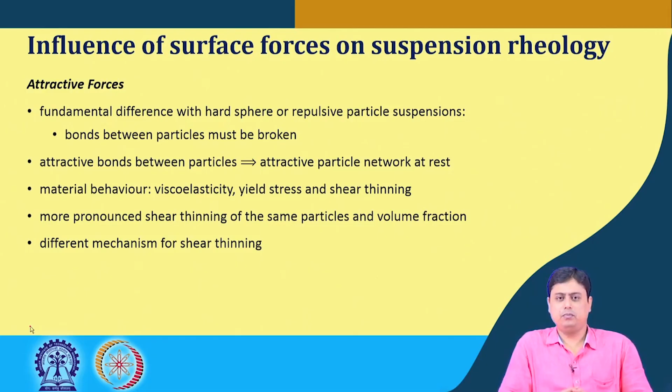So, one thing is clear: the material property will depend on the bond strength. The stronger the bonds, the more extra stress we have to apply in order to alter the viscosity or to make it flow.

Now this network of particles, the bond in between, has to be broken. While at rest, these networks encircle some of the liquid. As this network is squeezed or flattened, or bond breakage happens at high shear rate, more and more liquid will be released from inside that network.

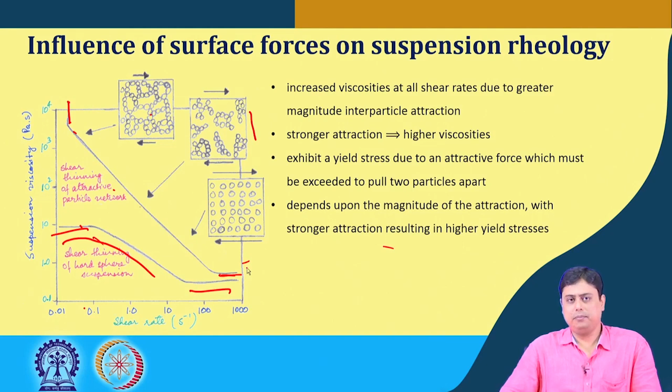Because as we increase the salt concentration away from IEP, the magnitude of the zeta potential decreases, and so does the EDL repulsion. So it becomes more and more attractive in nature. So this attraction increases as we increase the salt content. So once the overall interaction is attractive in nature, then quite naturally we need higher yield stress to initiate the flow.

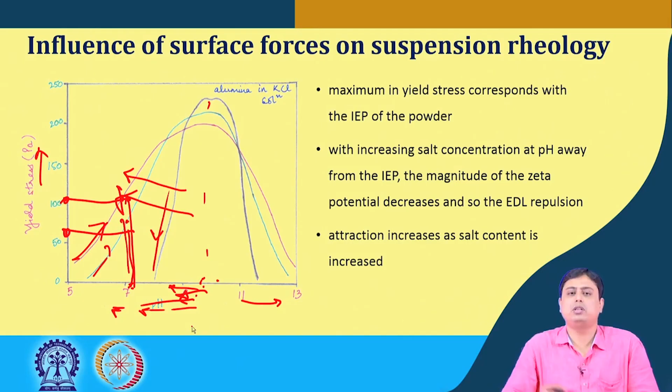This is because the zeta potential decreases and so does the EDL repulsion. So the overall interaction between the particles becomes attractive in nature, and as it becomes attractive, it is difficult to flow; the yield stress increases. But for a given salt concentration, if you go away from IEP by a change in pH, the zeta potential increases, so does the EDL repulsion, and it becomes more free flowing or more dispersive in nature; yield stress decreases.

Now in terms of particle size, how it is influencing the suspension rheology. In the case of the hard sphere approach, there was no influence of particle size on the suspension rheology. So this is another big difference between these two approaches, because here we have seen that the particle size influences the surface forces, and once we take into account the surface force, the particle size will influence the surface force and consequently the suspension rheology.

But in hard sphere there were non-interacting particles, so the size was not of any consideration in that approach. Now here the yield stress, how it would be influenced by the particle size, and similarly such analysis can be done for the other parameters. So yield stress basically is proportional to the number of bonds per unit volume and the strength of the bond, because in suspensions containing attractive particles what matters is the number of bonds we need to break and the bond strength.

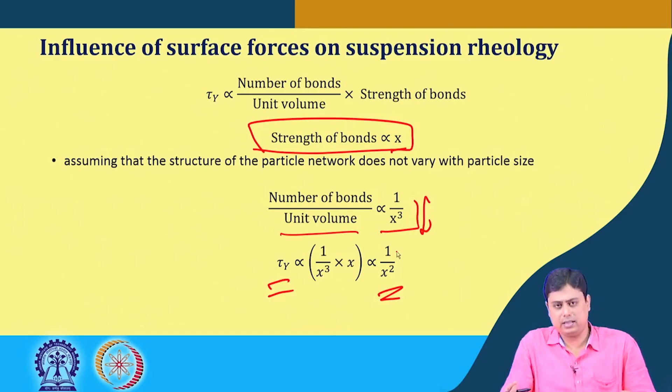So, the overall relation between the yield stress and the particle size in case of attractive particle suspensions is 1 by x square. Which means as the particle size increases, yield stress goes down. The viscosity would be lower as the particle size goes higher. So, for fine particles of higher concentration, we have higher viscosities.

So, when we have stress less than the yield stress, it would behave as an elastic-like response, where the bond stretches rather than breaks. Now, this stretching and breaking is basically a statistical phenomenon. So, it would not be a purely elastic behavior as one would have expected for a suspension with fine particles. Rather, it would behave viscoelastically, as I mentioned earlier, with the characteristics of both solids and fluids at the same time.

So, some energy that is applied in order to deform the suspension would be stored elastically, and the rest would result in viscous dissipation when the stress is less than the yield stress, or to initiate that flow.

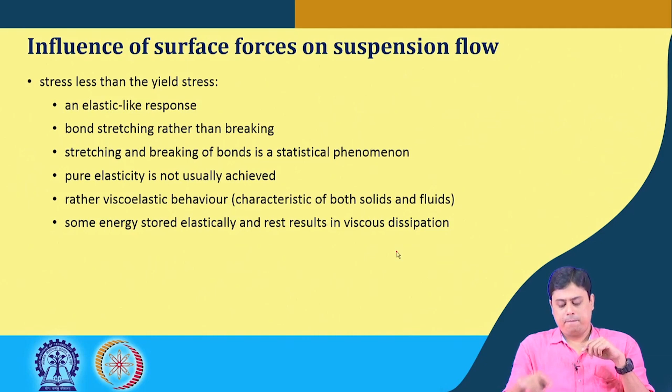Now, let us see how this practically influences the sedimentation rate as well, because from the engineer's perspective, one of the basic objectives of this course is to separate particles from fluid. We have done it in several cases like sedimentation, filtration, etc. Now, if we have a colloidal suspension, we try to understand how those fine particles can be settled.

Now, the stability of a colloidal suspension against gravity depends upon the ratio of sedimentation flux to Brownian flux. In sedimentation, particles denser than the fluid move downward and particles lighter than the fluid move upward. But the Brownian flux randomizes the motion of these particles. So, the relative magnitude of these two dictates whether it remains suspended or settles, and at which time frame. This relativeness actually dictates its stability.

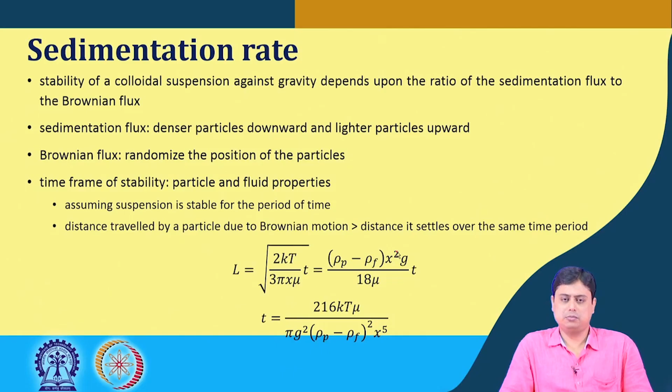Now, the distance it travels due to Brownian motion, we have seen this expression in the creeping flow regime, considering the Einstein equation and Stokes law. We have seen the length it can travel, and by rearranging with the Stokes law terminal velocity, we can find the expression of t, which has to be positive, because here it is root t and here you have t. It is a bit complex, but if we find the positive root of t, we get this expression. This gives us the settling time.

So, if we provide sufficient time, all the suspension will settle. But the logical question is, what is the time frame? We cannot provide months in a sedimentation tank or a thickener to have the particles settled. It has to be in the order of hours. Or in some suspensions, we do not want settling to happen.

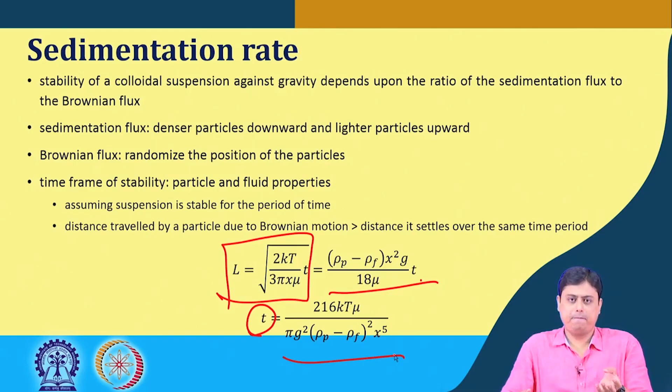So, both the scenarios exist. Now, that means this Brownian distance, we have seen it varies with the square root of time, and the distance settled depends linearly on time. So, all suspensions will eventually settle out provided we give enough time, and it is, as I said, important in various applications.

And in order to make it faster, polymeric flocculants are provided for the bridging attractions that we have seen earlier, that we add polymeric solution or polymeric material, it adsorbs on the surface and it can create aggregates. With larger aggregates, the sedimentation velocity then exceeds this randomizing effect of the Brownian motion, and it helps in gravity settling.

So, if you want to have gravity settling, it is the typical flocculant that we add, which creates aggregates, and again the mass or the size of the particle increases. So, size enlargement happens. As it increases, the sedimentation velocity increases or the body forces increase, which overcome the surface forces, and then we can have the gravity settling.

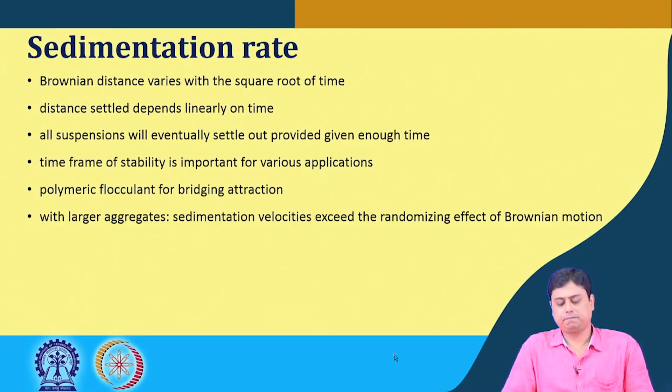So, that means interparticle forces actually dictate the moisture content of the sediment and the sediment consolidation. So, for example, in batch sedimentation, the sediment and the supernatant interface will stop moving after a certain time, and a final equilibrium sediment concentration will be achieved. The concentration in that sediment will vary from top to bottom because of the local solids pressure.

So, usually fine particles and colloids produce this compressible sediment. We have known now the definition of the compressible cake or the compressible sediment. Now, there would be a low sedimentation rate when repulsion or the Brownian motion is the dominant factor, because it would try to remain dispersed for a longer time.

So, it would result in a concentrated sediment bed and would approach a value that is near random dense packing of the monodispersed particles. It is the maximum packing limit that it can achieve if these particles are repulsive in nature, because it has the ability to rearrange into a lower energy state than the attractive particles, which form aggregates very quickly, which form as a consequence open sediments, and that means again the aggregates will contain more and more moisture or the liquid inside.

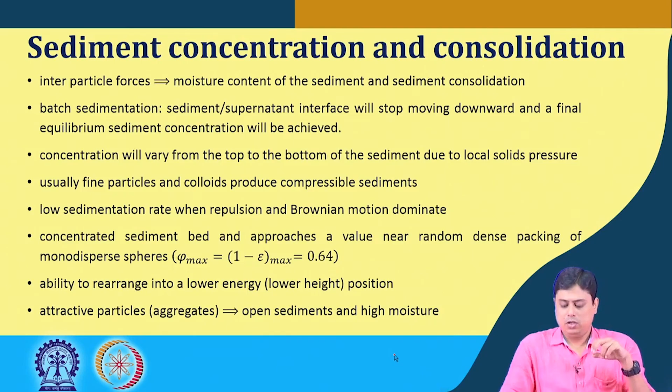So, the scenario is something like this, that this is, say, the stable suspension by repulsion. After a long time it would remain in the same state. Again we put it for a further longer time, we have a stable suspension with dense sediment.

In case of suspension with the repulsion, if we add flocculants, it would immediately create such aggregates, and after a shorter time we see the sediment with more voidage that entraps the liquid phase, or the moisture content is higher in this case.

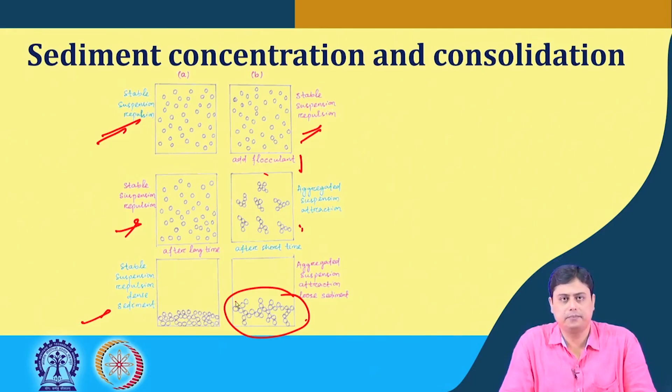So, what can be done? The application of pressure to the particle network in order to compress that, like in a filter press or a centrifuge, or by putting a weight on the top of the sediment. The response to this application of pressure depends on the interparticle force. If the particles are repulsive in nature, we have the near maximum random dense packing at all consolidation pressures.

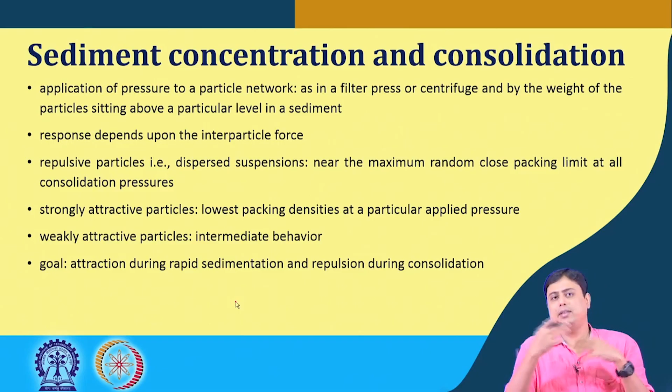That means we try to now consolidate the sediment. For that we have applied the pressure either by centrifuge or by filter press or by putting some weight on the top of the sediment layer. If these are strongly attractive particles forming the sediment, then still we will have the lowest packing density at a particular applied pressure. When we have weakly attractive particles, we have the intermediate behavior between these two, that is the maximum dense packing and the loose packing.

Ideally, what should have happened? The goal should be that we can have the attraction during this rapid sedimentation, but when the sediment consolidates, there will be repulsion, so that it can have a dense packing, or say the sediments with a low moisture.

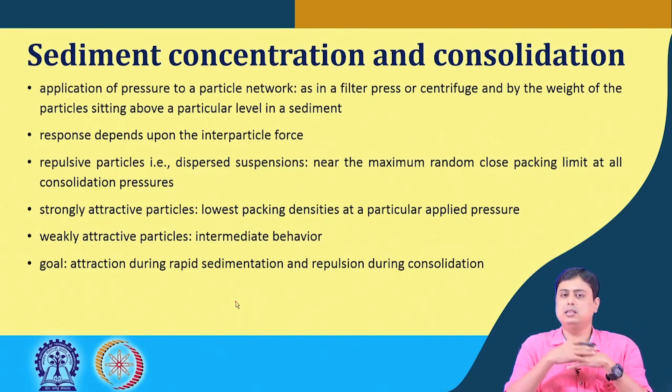Once again, our goal should be to have rapid settling in case of solid-liquid separation, rapid settling of the solid particles, and for that we need attraction so that it creates aggregates. But once it settles, during consolidation of this sediment, we want the particles to be repulsive in nature. So, this kind of tuning has to be done, and this is the current area of research, that we need faster settling but with dense sedimentation.

So, these are the impacts of the fundamentals of fine particles when we talk about solids handling. We have seen in a relatively detailed manner what the surface forces are, how they influence the suspension rheology, and how a colloidal or fine particle suspension and its sedimentation rate is influenced by the particle interaction.